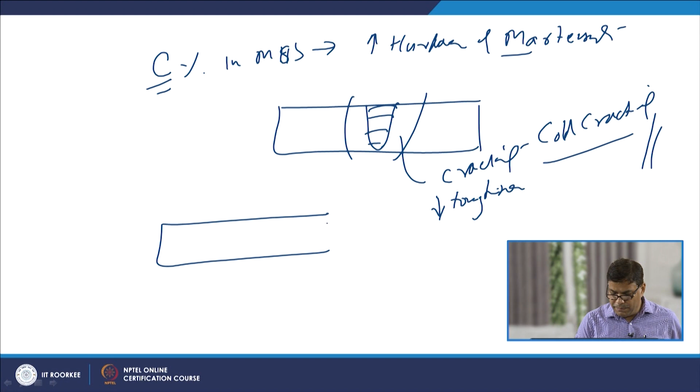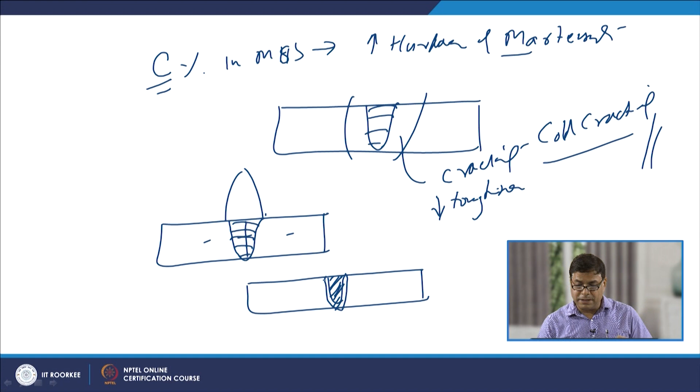At the same time, formation of the hard martensite in the weld as well as heat affected zone decreases the toughness, and this may lead to reduced resistance to impact load conditions of the martensitic stainless steel weld joints. These situations may arise especially when either we are using the matching kind of filler or an autogenous weld is being made. Matching filler means the weld metal is similar to that of the base metal, or when the autogenous weld is being made, just a fusion of the faying surface is realized, and subsequently on solidification we get the weld joint. So, in both cases the chemical composition of the weld metal is similar to that of the base metal, and that is why it promotes the cracking tendency, and the properties of the weld metal and the heat affected zone will respond almost in the similar way.

But in situations when the martensitic stainless steel is welded using austenitic stainless steel filler metal, like 307 or 310 kind of filler metal, since the austenitic stainless steel is of lower yield strength, higher percentage elongation and high toughness, these are the added benefits. When martensitic stainless steel plates are welded using the austenitic stainless steel filler, the weld metal is predominantly comprised of austenitic stainless steel. Since it is of lower yield strength, greater elongation and greater toughness, the chances for cracking of the heat affected zone are reduced due to reduced residual stress formation. So, it imposes lesser strain in the heat affected zone as compared to when we use similar or matching filler metal.

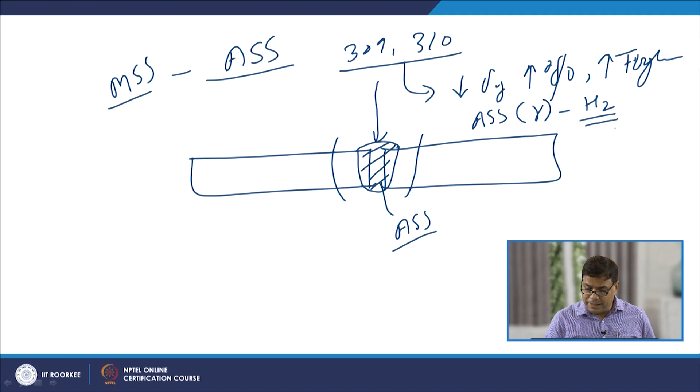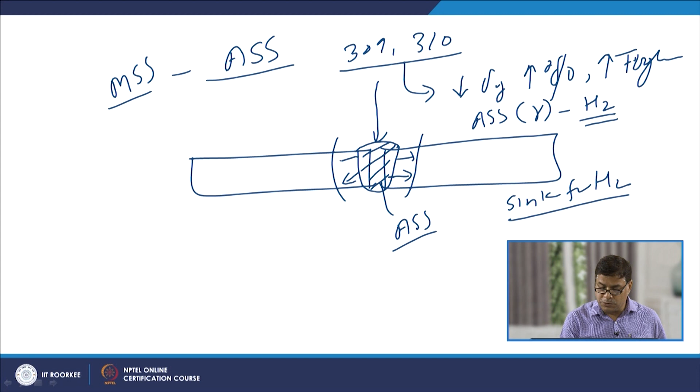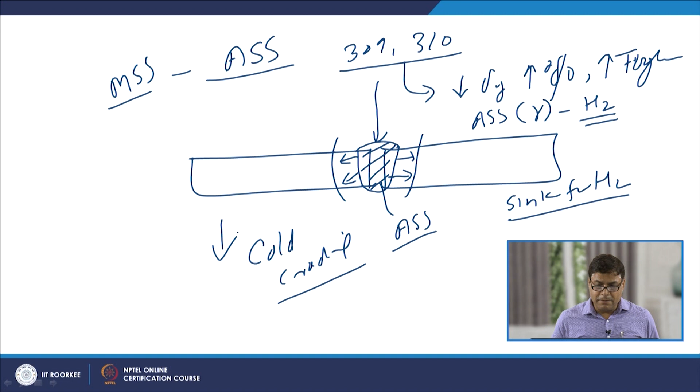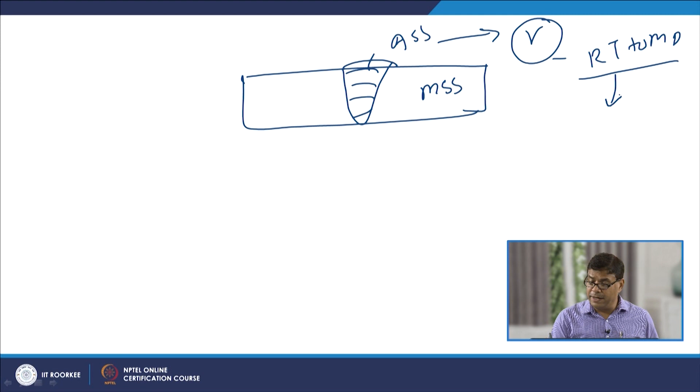At the same time, since the austenitic stainless steel has austenite, which shows greater solubility for hydrogen, the ASS weld metal acts as a sink for hydrogen, and it does not allow the hydrogen to get into the heat affected zone and the base metal, and that is why the cold cracking tendency is reduced when austenitic stainless steel fillers are used. But we know that whenever the MSS is welded using austenitic stainless steel filler, since the ASS remains in the austenitic state right from room temperature to the melting point, despite higher cooling rates it does not respond to heat treatment and leads to austenite even at room temperature.

There is no hardening. So, the weld metal does not respond to the weld thermal cycle, and this must be assessed from the property variation point of view across the weld joint, especially when austenitic stainless steel fillers are used, or when the weld joint is subsequently subjected to PWHT, post weld heat treatment, for improving the properties. The weld metal of ASS will not respond to the heat treatment, so these aspects must be assessed when the filler metal is austenitic stainless steel.

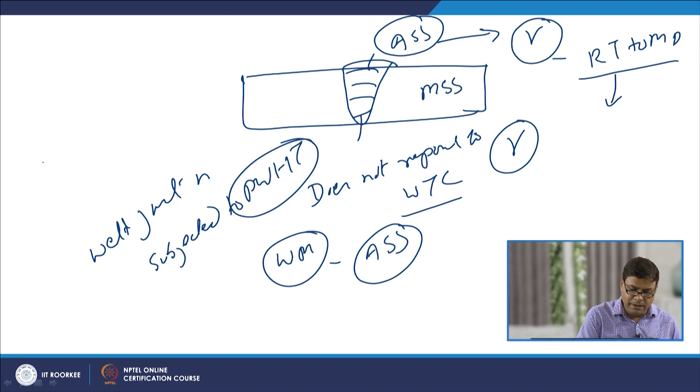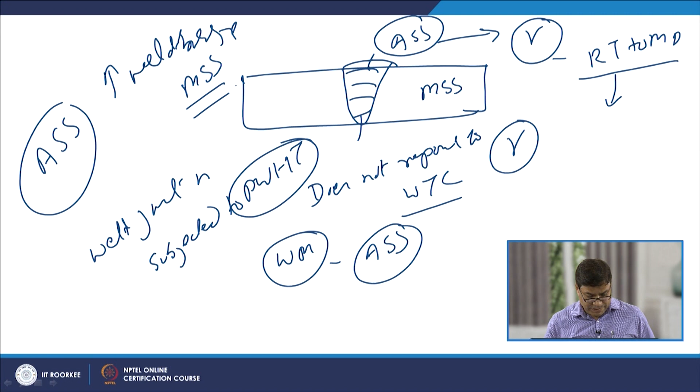In general, application of ASS improves the weldability of the martensitic stainless steel, and if we do not use this kind of filler metal, we will find that MSS is sensitive to cold cracking due to high hardness and the presence of hydrogen, high hardness in the form of martensite structure, and the development of tensile residual stresses.

So, such a combination promotes cold cracking, and this cold cracking tendency in the case of MSS is similar to that of low alloy steels. Therefore, to prevent cold cracking in MSS, we will use similar procedures as in the case of low alloy steels to control the delayed or cold cracking tendency.

In our procedural aspects, we have to use low hydrogen practices, which include the use of suitable welding processes generating less hydrogen in the weld zone, use of suitable consumables in the form of shielding gases or electrodes so that hydrogen does not get in, proper cleaning methods, proper preheating and post weld heat treatments, so that whatever hydrogen is there gets enough opportunity to escape from the weld metal as well as the heat affected zone, so that the cracking tendency can be reduced.

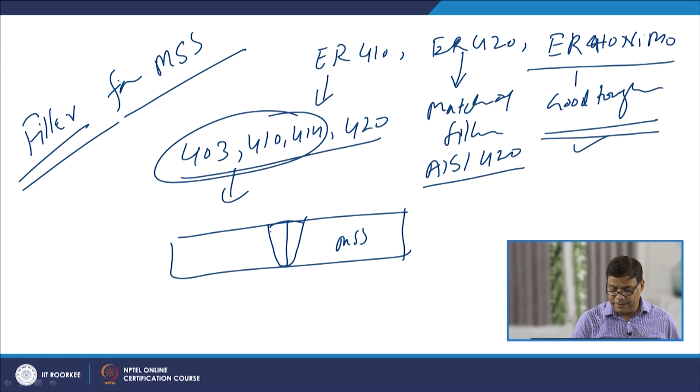When we want the weld joint to be used in the as welded condition, then ER410 NiMo filler is used. It offers very good toughness. While in the case of AISI 420 martensitic stainless steel welded with the matching filler, the entire weld as well as base metal will be the same, and we can apply the complete quench and temper heat treatment for uniformity in properties across the weld joint.

So, 420 filler for joining AISI 420 base metal will lead to uniformity in composition and properties. Therefore, whenever we need very good corrosion resistance, uniformity in mechanical properties and good response to heat treatment, the matching filler helps in realizing this. At the same time, the E420 electrode is also used for hardfacing of simple mild steels where good corrosion as well as wear resistance is required. So, these are some of the fillers used for joining.

As I have said, use of austenitic stainless steel fillers helps in improving the weldability of martensitic stainless steel because it offers lower yield strength, greater ductility, greater toughness, and it also acts as a sink for hydrogen. So, it reduces the cold cracking tendency. There are a few grades of austenitic stainless steels effectively used for welding martensitic stainless steels, like 308, 309, 310, and all these offer very good toughness and reduce the cold cracking tendency of the weld joint.

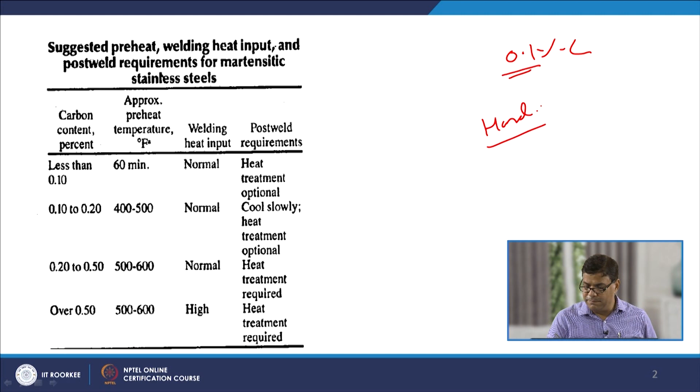If we do not preheat and allow the weld joint to cool down directly to room temperature, then the chances for cracking will be more, especially when the carbon content is greater than 0.2%. If the carbon content is less, then the hardness of the martensite and the hardness of the heat affected zone as well as the weld metal will be low, and less hardness will be able to avoid the cracking tendency. So, preheat is very crucial especially when the carbon content is greater than 0.2%. Apart from the composition, the thickness, the filler, welding process and restraint are other factors affecting the kind of filler to be used.

So, this table is showing the preheat temperatures to be used in Fahrenheit as a function of the carbon content present in the martensitic stainless steel. For low carbon content, normally preheat is not used and we may get a successful weld joint without any tendency for cracking. The minimum preheat is 60 degree Fahrenheit. In any case, if the ambient temperature is very low, then the minimum preheat of 60 degree Fahrenheit is to be used.

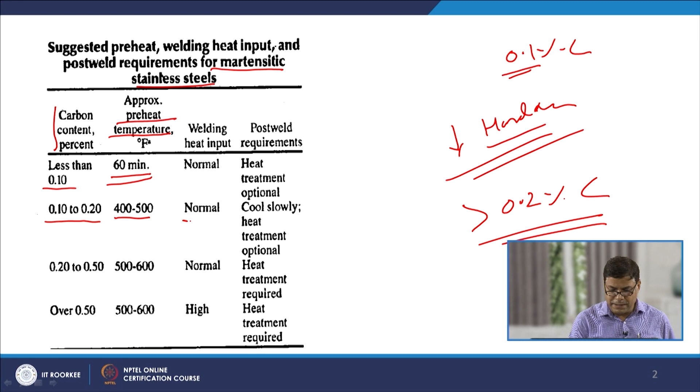When the carbon content is in the range of 0.1 to 0.2%, preheat in the range of 400 to 500 degree Fahrenheit is used with normal heat input, and we need to use slow cooling after welding; heat treatment is optional. When the carbon content is in the range of 0.2 to 0.5, a very high preheat temperature is used, like 500 to 600 Fahrenheit, and in this case post weld heat treatment is important in order to relieve the residual stresses and induce the toughness and required mechanical properties.

Likewise, when the carbon content is greater than 0.5%, 500 to 600 degree Fahrenheit preheat is used, and high heat input is recommended so that the cooling rate can be reduced, and post weld heat treatment is also recommended. So basically, when the carbon content is up to 0.2, post weld heat treatment is optional, and for carbon content greater than 0.2% in martensitic stainless steel, heat treatment is mandatory.

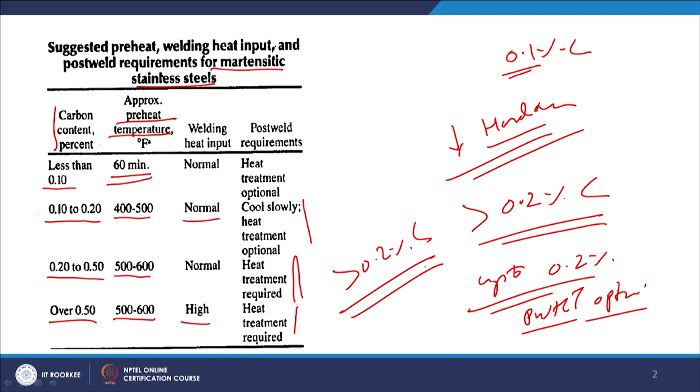So, what are the purposes of post weld heat treatment of martensitic stainless steels and the kinds carried out? There are two broad categories. One is used for tempering. Tempering will reduce the hardness, increase the toughness of the weld joint, and improve the percentage elongation and the ability to take up impact load. On the other hand, stress relieving heat treatment is carried out in order to lower the tensile residual stresses if they have been developed. So, these are the two purposes of the post weld heat treatment: improving toughness, reducing hardness, and relieving residual stresses.

As far as the types of PWHT given to the weld joints of martensitic stainless steels, one is subcritical annealing, and the second is full annealing.

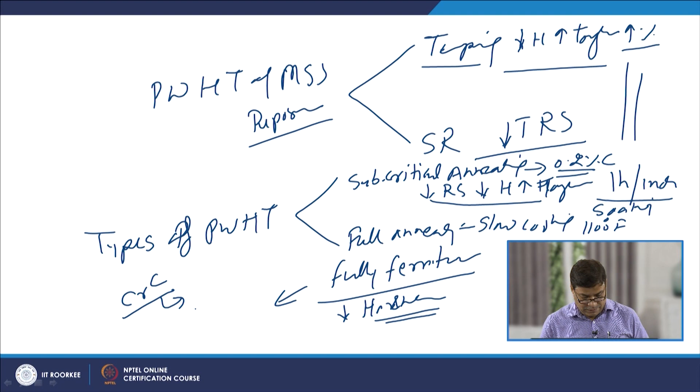Now, we will see the heat treatment conditions which are used. There are two broad types of annealing treatments: one is subcritical annealing and another is full annealing. For different grades of martensitic stainless steel weld joints, different temperature values are used for subcritical annealing as well as full annealing. The maximum heating temperature is different for the different types of annealing; like 403, 410 martensitic stainless steel needs subcritical annealing at 1200 to 1400 degrees, while for full annealing it is 1525 to 1625.

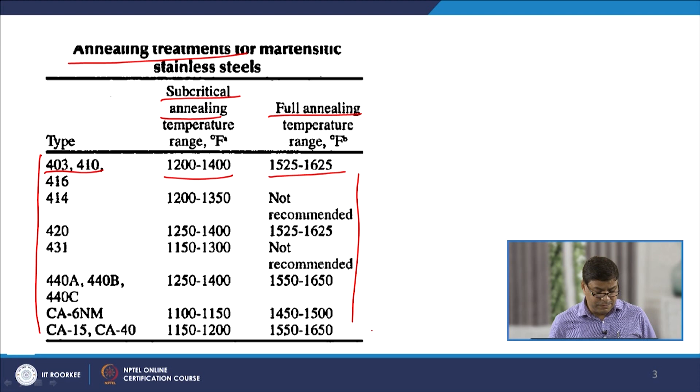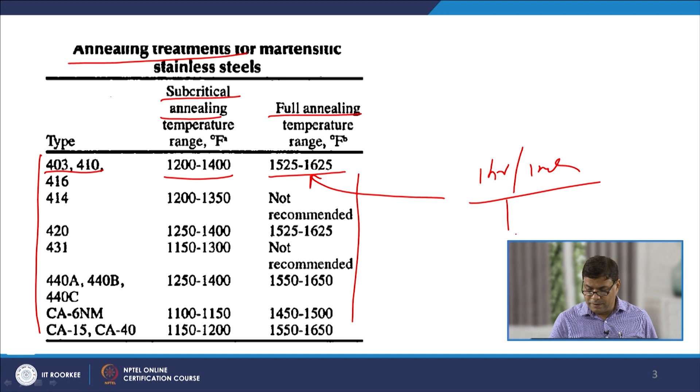And likewise there are different values of the maximum temperatures for the different grades of martensitic stainless steels. So, for full annealing, as I have said, after heating to the required temperature, the exposure is given at the rate of 1 hour per inch section thickness, and thereafter slow cooling up to 1100 degree Fahrenheit, followed by air cooling. That is how it is performed.

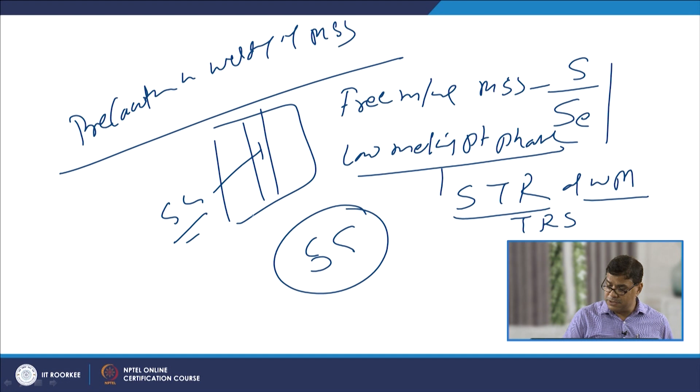Now, there are a few additional precautions needed when we are welding martensitic stainless steels. Precautions in welding of MSS basically fall in two categories. One is when we are using free machining MSS. Free machining MSS will have sulfur or selenium, Se, and both these elements, when present in martensitic stainless steel, form low melting point phases and compounds, which increase the solidification temperature range of the weld metal. Due to the development of tensile residual stresses in the weld metal, it shows a tendency for solidification cracking, which occurs along the weld center line due to such low melting point phases.

So, the best way is to reduce the dilution so that the minimum amount of sulfur and selenium goes into the weld metal. At the same time, use of austenitic stainless steel filler like ER312, having 29% chromium and 9% nickel, helps in reducing the cracking tendency of free machining martensitic stainless steels.

Another precaution is associated with MSS having carbon content greater than 0.2%, like AISI 431 type. Because of the higher carbon content in these grades, there is increased tendency to form high hardness martensite. Because of the high hardness and residual tensile stress formation, it leads to increased cracking tendency. So, we need to provide proper preheat and post weld heat treatment to reduce the cracking tendency: preheat as well as interpass temperature followed by a slow cooling rate.